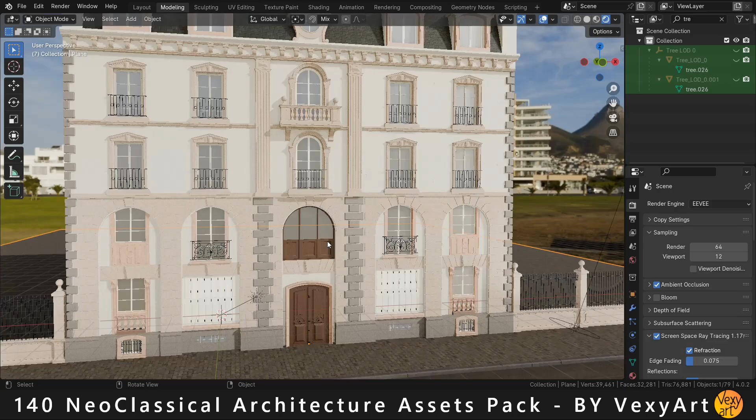Hi. In this video, I will show you how to use Blender to model any neoclassical building or facade of French and European architecture for your project, and to do it quickly and in record time.

For that we will be looking at a very extensive asset pack, comprising of more than 140 models of neoclassical facade elements of rich and unique geometry.

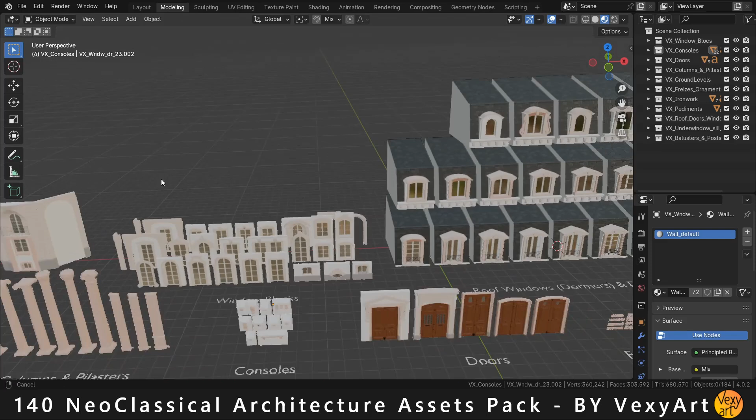This is your shortcut to save enormous amounts of time and gain more creativity, freeing yourself from the tedious job of complex modeling. Instead, you can play around with the assets and iterate quickly between endless compositions and designs. You will be slashing your project time and making much more money than if you modeled everything from scratch.

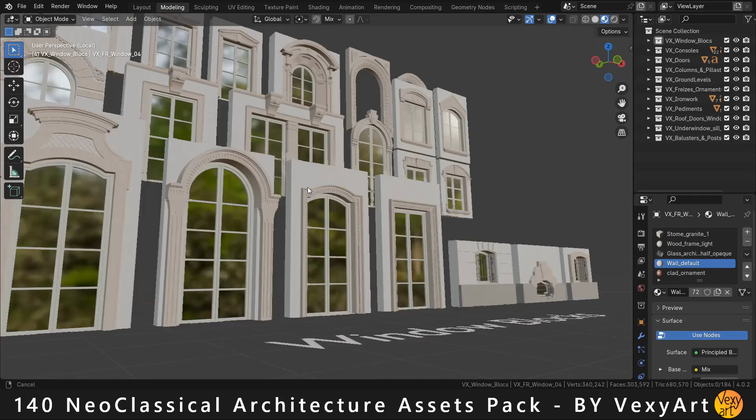With this pack, you can create complete neighborhoods with facades that are all unique and different from each other. It ships with 29 neoclassical windows of different shapes and levels of detail and unique styles, modeled after real-world buildings, and 6 rich balcony guards of varying complexity.

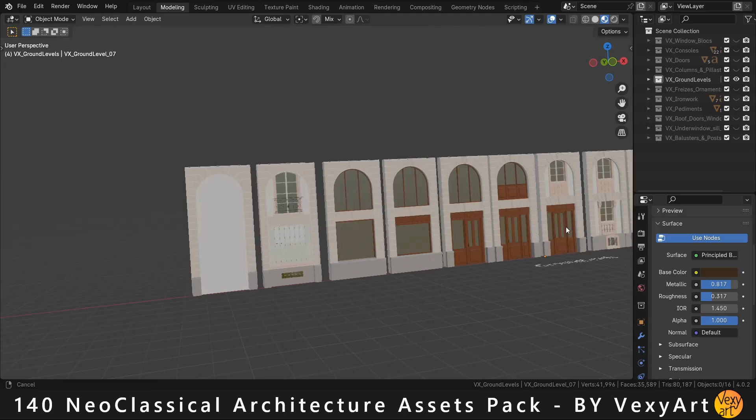13 models of modular ground level sections of the facade with double height, 6 columns and 3 pilasters, and 12 beautiful and rich consoles or corbels to support your balconies.

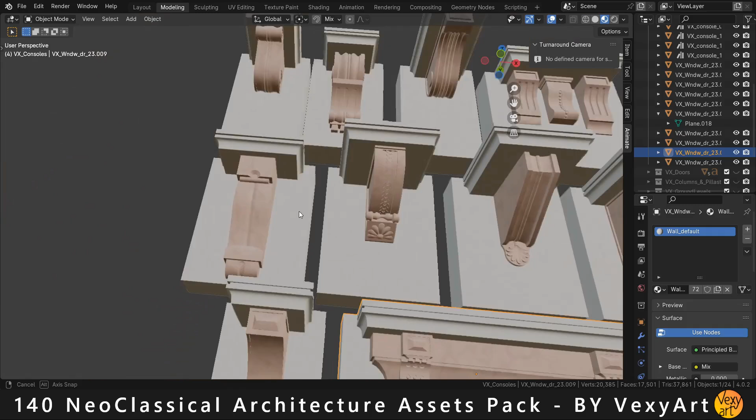21 models of roof dormer windows and mansard roof balcony doors, five majestic entrance doors, and 5 beautiful pediments to place over doors or windows.

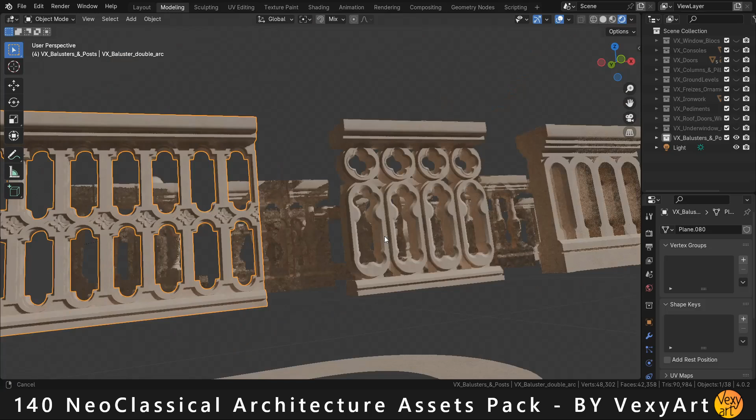25 luxurious and authentic balcony balusters and baluster posts and runs, finely modeled with strong attention to detail. Add to that 7 under-window models to place under the sills. To crown the building, 8 models of ornate friezes to embellish your facade and enrich your cornices.

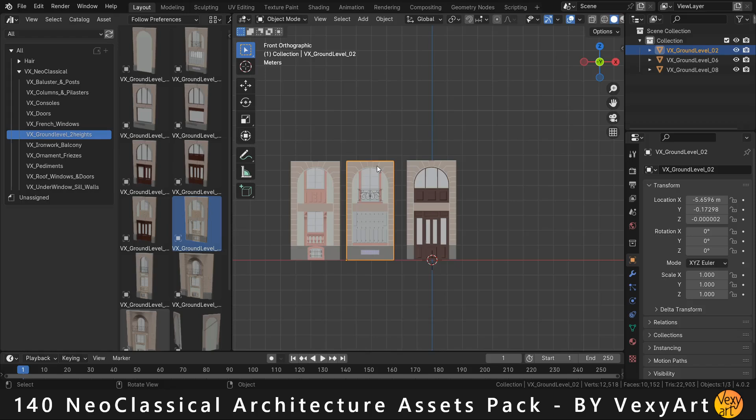Because this is a residential building, we will modify the central piece and add to it a big entry door.

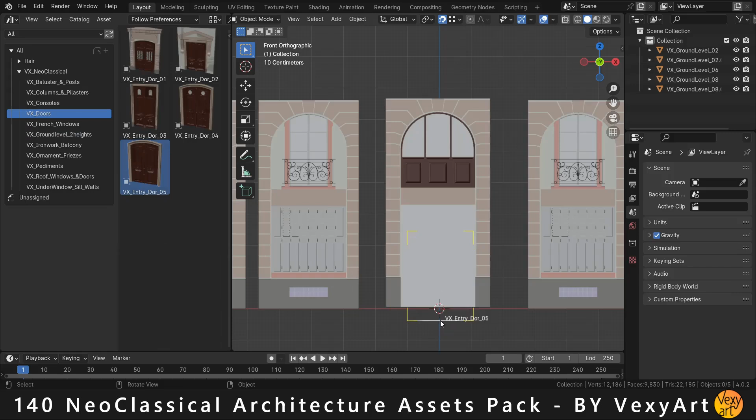Add the facade spacers and place them around the entry block to give it more grandeur and set it as a visual focal point, then add the quoins at the corners of the building.

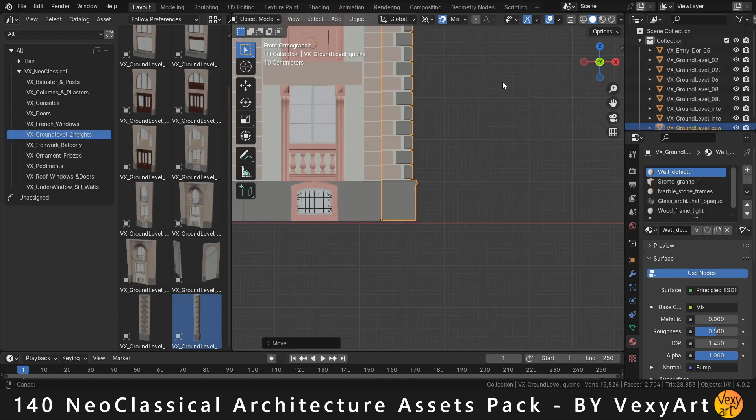Next, for the upper levels, choose a window style that suits your vision of the building and place them above the ground level blocks at the sides. Duplicate the elements and mirror them around the building axis.

For the central window, choose a different window style and place it at the center.

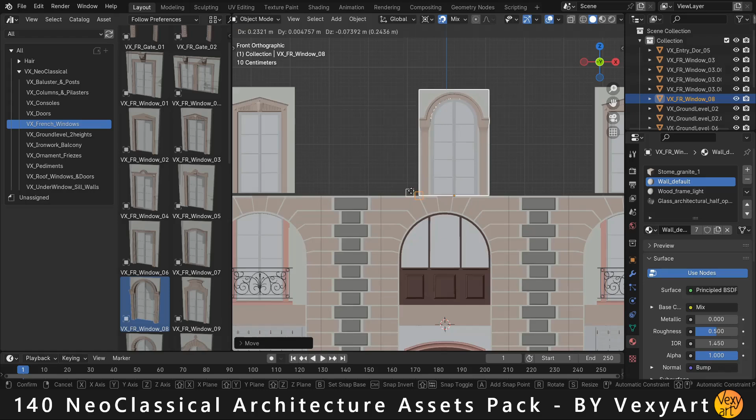From the asset browser, select a pilaster element and place it around the central window, above the ground floor facade separators.

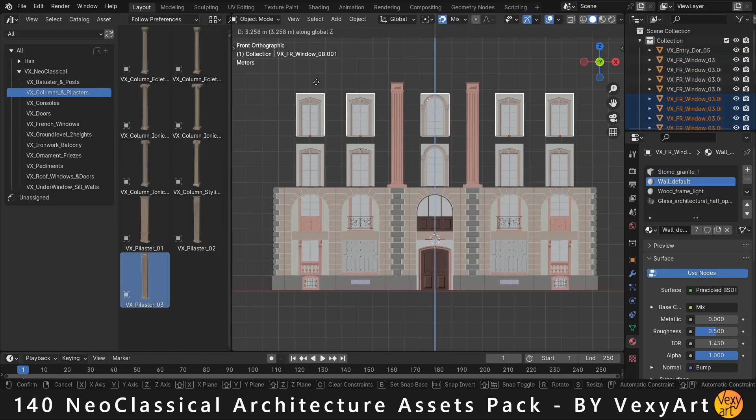Duplicate the upper level blocks and place them on the top to form the third level. Now is the time to edit the used elements to form a continuous and coherent facade.

Select the window blocks that still have spaces between them, enter edit mode and extend or stretch the walls onto the adjacent elements.

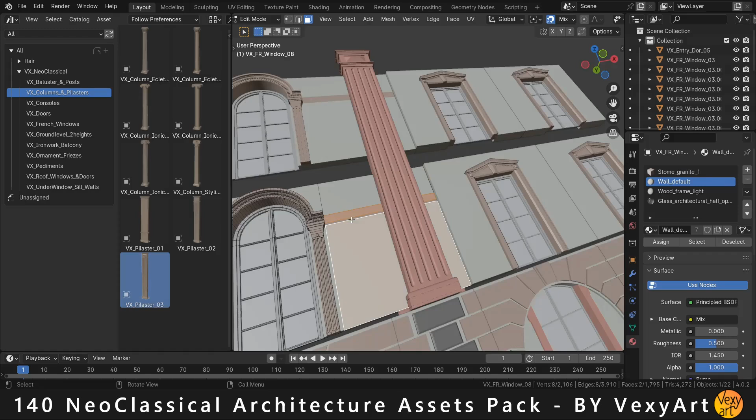Scale the pilasters to span the height of 2 stories. Like here, I have given them the height of 5.85 meters. Extend the pilasters' base moldings to fill the width of the facade.

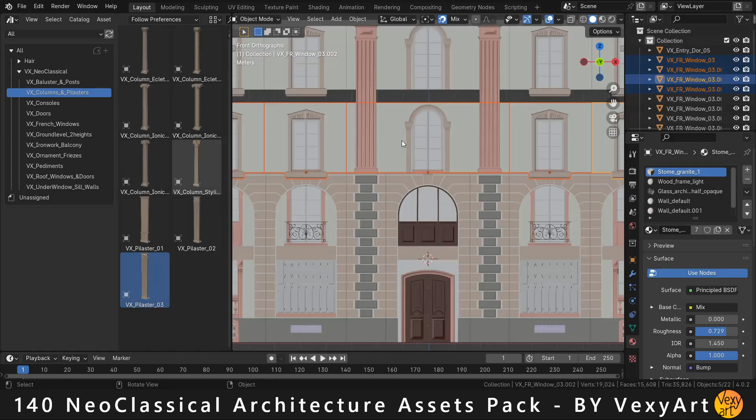Then adjust the above window's height to sit right on the ridge.

In neoclassical architecture there is a prominence of separation elements, among them floor overhangs, that protrude to sequence the facade.

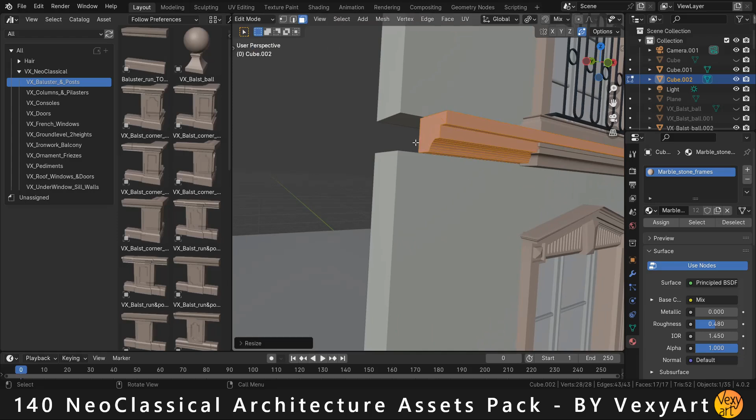You can make them from a basic cube, modify it to give a convincing trim molding, then extend it to fill the whole width of the facade.

Add small balcony extrusions to the windows to form the characteristic French balconies. Duplicate and place them below the rest of the windows.

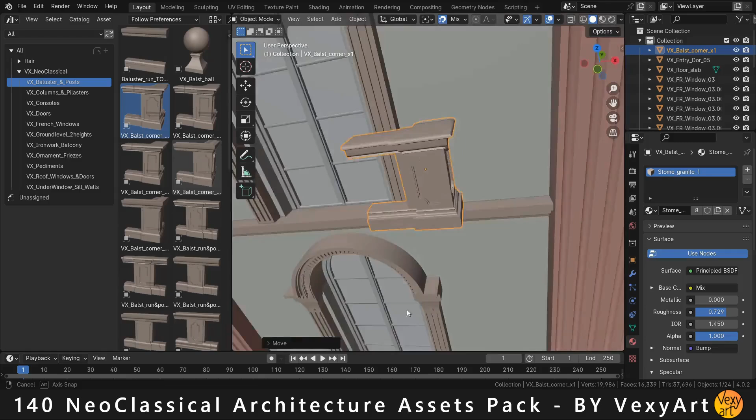Next, we will add a balcony to the final central window. For that, choose a baluster style you like, add the balcony run and rail, and add the posts at the 2 ends of the balcony.

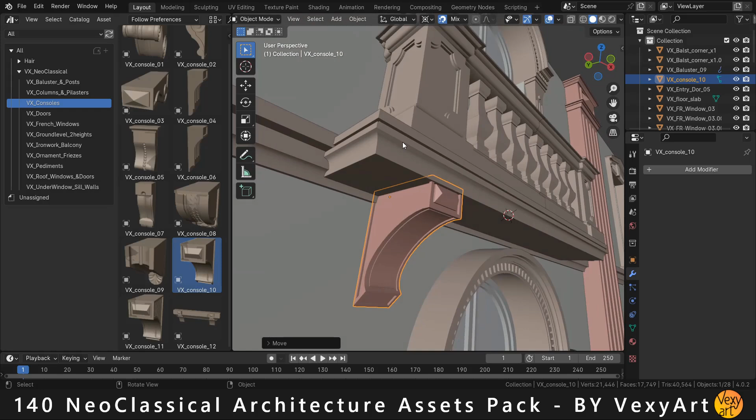Adjust the number of balusters you need. Add a balcony slab by either shaping it from a standard cube or importing one from the Blender file you downloaded. Now choose a balcony console or corbel from the asset browser to support the balcony and place 2 of them below the slab.

Duplicate one of the quoins and move it to the top. In edit mode, remove the lower part by cutting through all the faces using the knife tool, then delete the lower part. To keep the quoins, select 2 of the stone faces, then select similar by area, deselect one side of the faces and keep the other side only.

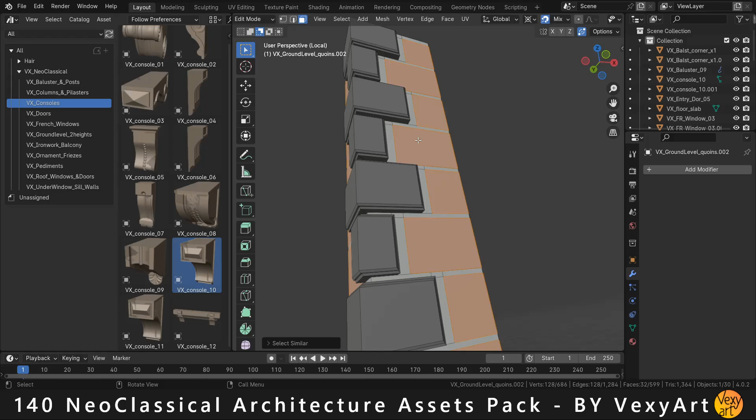Make sure the Auto Merge Vertices option and the option Split Edges and Faces are turned on, to move those faces flat with the wall. Repeat this with the stones of the other side. Now select all those flattened faces and change their material to wall_default. Duplicate and mirror this quoin to the other side of the building.

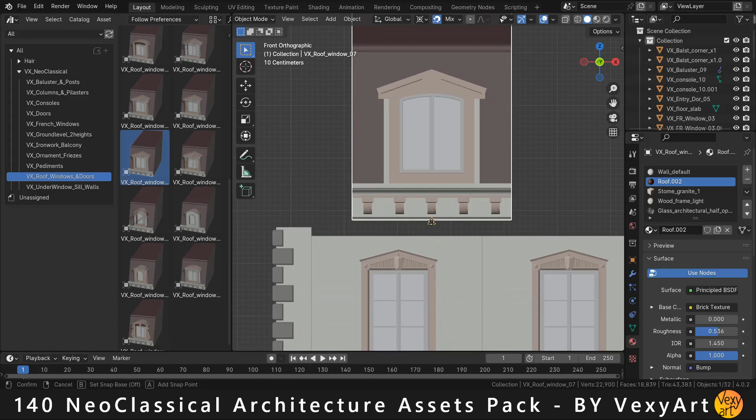Now for the roof, we will be placing dormer windows, so from the asset browser drag and drop a roof window model you like, and duplicate it around on top of each window of the lower level. Select a different dormer roof window for the central piece. A round window will keep with the idea of rounded windows at the center of the facade.

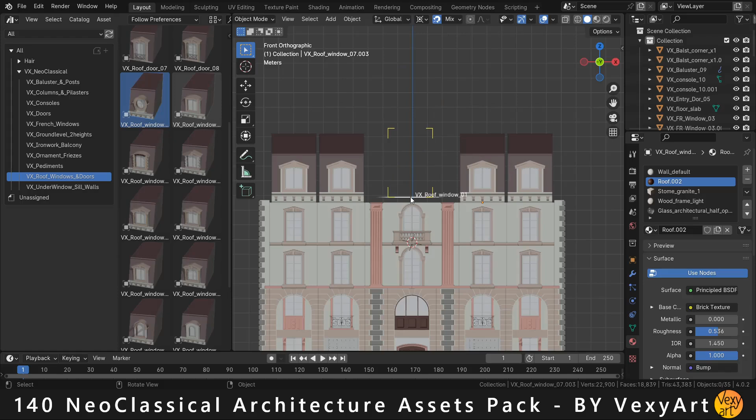Make sure to center all the windows and blocks with those below and above them, before extending the faces. In edit mode, make sure the correct face attributes are checked under options, otherwise it might stretch the textures applied. Now is the time to edit the used elements to form a continuous and coherent facade.

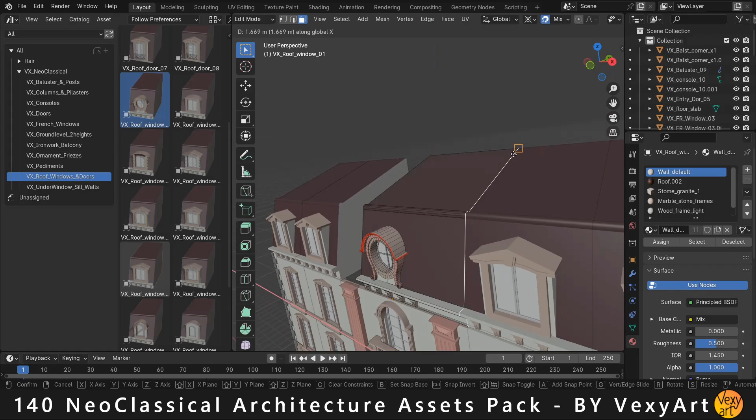Select the window blocks that still have spaces between them, enter edit mode and extend or stretch the walls onto the adjacent elements. Join the roof segments into one object, merge the meshes and faces for the UV to span the whole length of the facade.

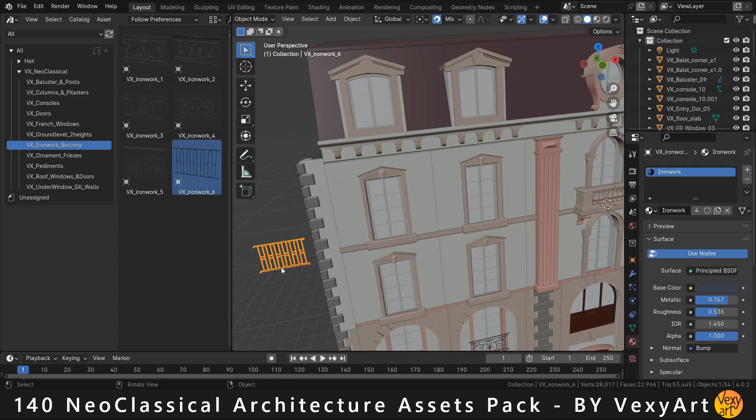From the asset library, choose a balcony iron guard that suits your vision, place it next to one of the windows and adjust it to sit at the center. Now, because the windows are duplicate links, just join the balcony guard to one of the windows to make it duplicated to all the other windows.

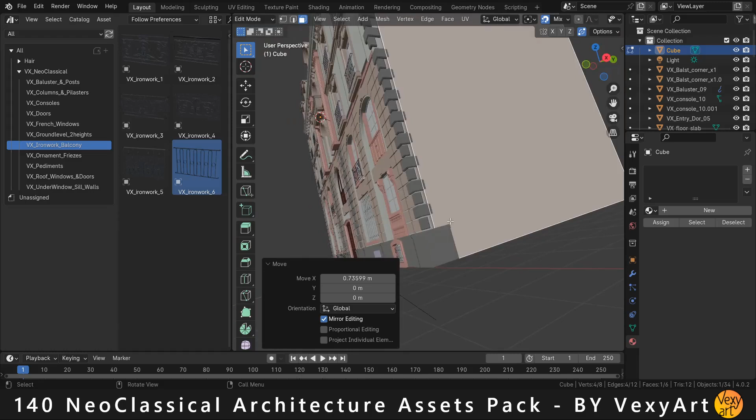Add a cube, resize it to the width and height of the building, and place it behind the facade, to form the gable walls. Resize the roof depth and the building depth to make it look realistic.

Insert a cube and stretch it to form the ground and sidewalk, as well as the road.

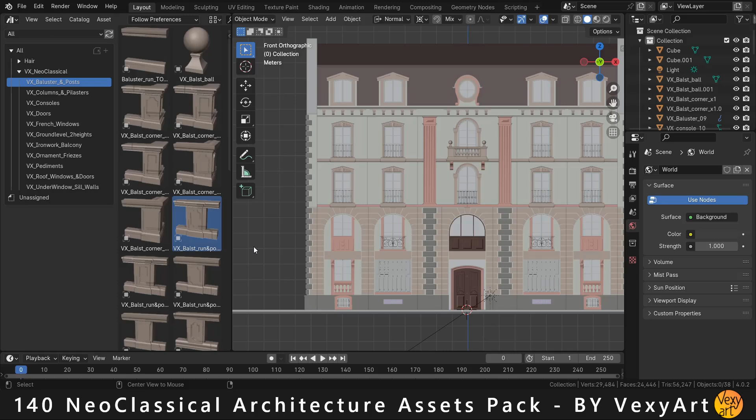For the 2 property walls on both sides of the building, insert a balustrade post from the asset library, modify it by removing unneeded geometry, resizing it, and extending the runs to make the lower part of the wall.

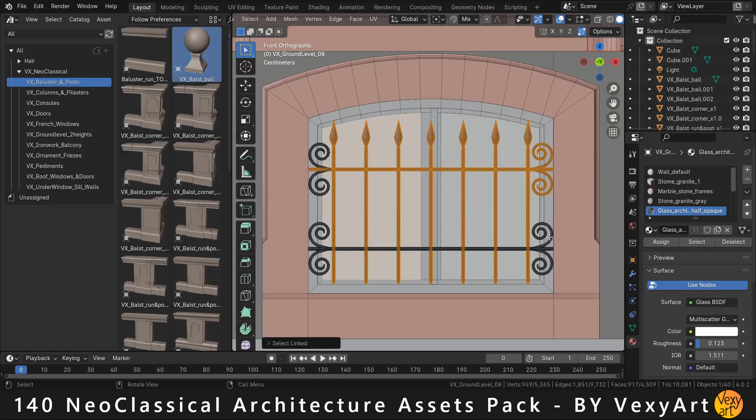Copy the ironwork of the lower windows of the facade, rescale the vertical bars, and turn them into an array. Fit the rest of the horizontal bars and volutes to the width of the wall. Now duplicate and mirror these sides around the building.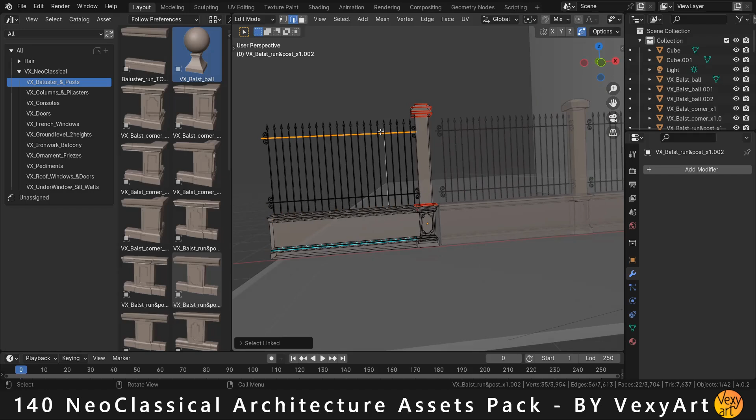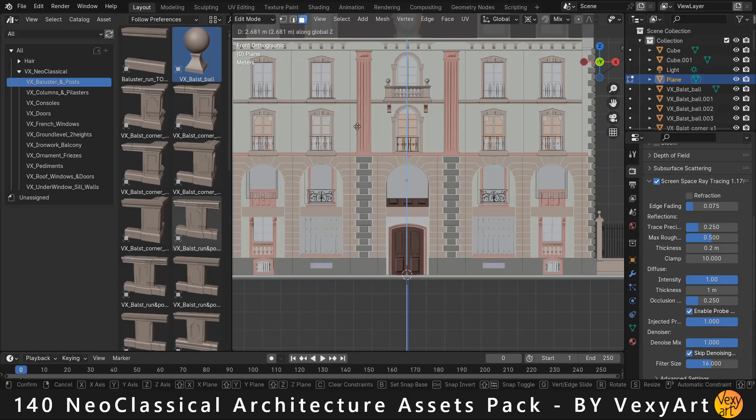Add a plane, scale it and place it behind one of the windows, duplicate it and place it behind the rest of the windows. Adjust the size of the plane to fit the size of the windows.

Download a texture of white curtains from the internet and assign it as a material to these planes. To finish, make all the needed adjustments by scaling the elements so they fit well together. You can use your own textures for more realism.

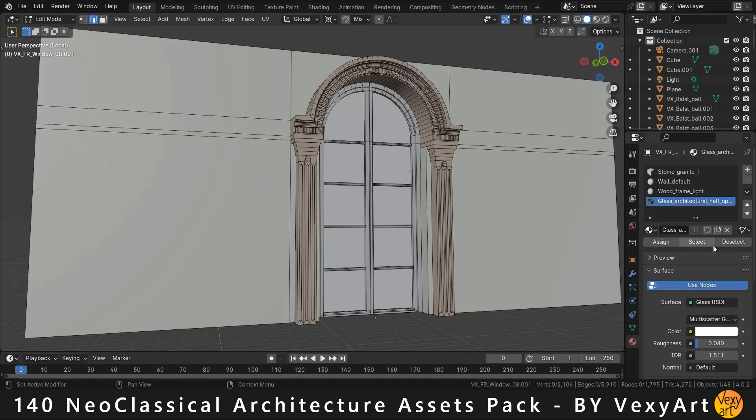All the meshes have materials applied to different parts of the mesh, so replacing the textures is as easy as changing the materials in the material slots.